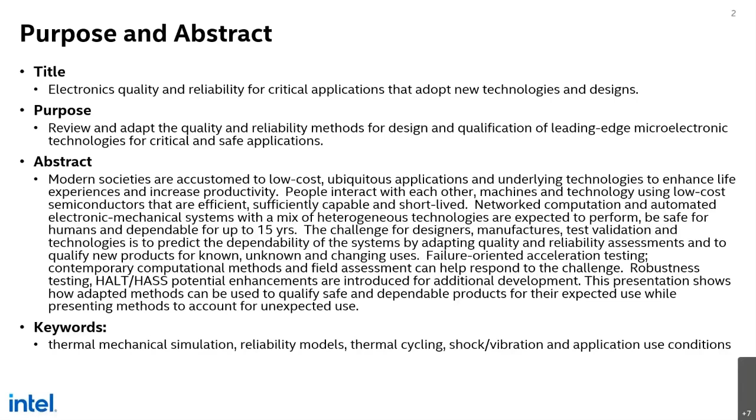We'll talk a little bit also about the HALT and the HASS methods in the context of the presentation here. We can recognize that those are a little bit different testing, and we'll see how we can use them. So we'll show the motivation, the demand and the use environments, so what we will be designing for and testing against, and then we'll speak a little bit about failure-oriented accelerated testing. And this essentially is test to failure, as was mentioned in the previous presentation.

And this particular verbiage was actually defined by Dr. Suhir here. And then the physics of failure models, specifically how we'll use some different sorts of failure models and look at the physics of failure. My undergrad, part of it is in physics, so I may have a different view of this than your traditional folks in mechanics or in electrical, which dominate a lot of people in packaging and some of the semiconductor reliability. So I'll put that spin on it. Then there's the statistics and its implications, and again the discussion on the HALT test and the HASS testing.

So the motivation that we have today is essentially that the electronics we use are ubiquitous, so they're all around us and they enhance our lives. We tend to access them with short-lived mobile phones, tablets, or through gaming devices. There are other devices that are productivity devices that have a medium life, so we pay more for them and we expect them to be available more often, and the level of performance we expect to be somewhat higher. And then there are infrastructure and safe devices that are very long-lived, very expensive, and have different sets of requirements. So these are the devices that we'll be talking about today, essentially the infrastructure and the safe devices.

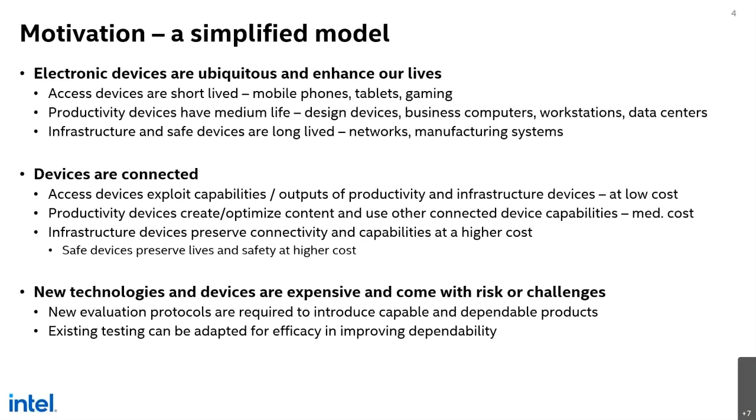And we can speak a little bit about that. So all of these essentially speak to some part of dependability. And dependability, we will have a discussion of that in the next slides. So the dependability is most important for shared use and safety. So if we really want to have ubiquitous computing, and it's like a utility, a telephone, you turn it on, it's there all the time and we don't notice, then we need to have a different approach and look at things from maybe a system level approach and then down to the component level approach.

And then the reliability and essentially dependability, we have to design into systems and components a priori. This can't be qualify it and then improve. You have to understand the use a priori and design that into the technology. So that goes into every aspect of the decisions made for the technology you're using. So if you're using certain transistors, they need to operate with a certain performance. You need to know how they're going to be used in the end and what types of circuits that you're going to use them on.

That allows you then to change doping levels and the gate lengths and materials from the atomic scale. And then when you move into the packaging level, you're going to pick different materials to accommodate the various stressors that come from the various temperatures or the various electric fields or these days maybe even magnetic fields.

And then lastly, we want to have some quality and reliability estimators that are validated upon qualification. So this is basically a building process. You need to design in reliability, test for it, and then you need to test for the quality and make sure that those reliability estimates are all good. And we'll have how that flow works courtesy of my co-author Joe here.

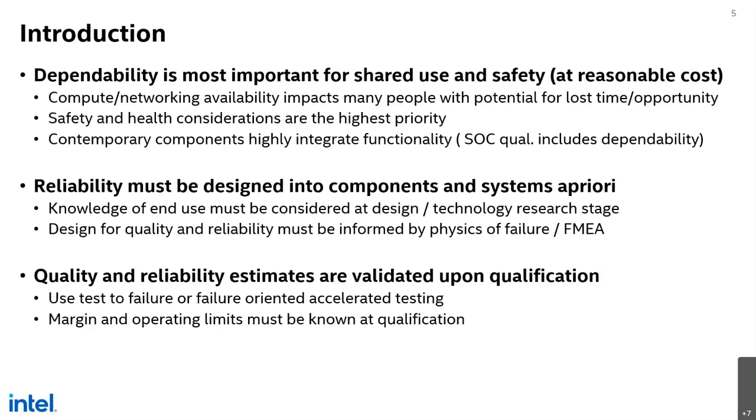So again, another slide on the heterogeneous products that integrate many functions. And this slide's a little bit complicated, so I'll walk us through it. If you look at packages, let's say about 20 years ago, they were very simple. They came in a standard design and a standard layout. So you connected to power with pin 1, and you had outputs in pins 5 through 8, sort of like that. That would be a standard design.

When we moved into plastic BGAs and even starting with the PPGAs, we started to see some customized design. And with the plastic FC BGAs, we were able to then start optimizing electricals in the package to match or enhance those electricals that are needed by the silicon. So that interconnect and the optimization there became very important. We were then also able to start optimizing electricals and lastly, thermals in the package level.

And as we go forward here into these custom designs, we're moving now into full design integration. So you have silicon or many pieces of silicon that are integrated onto a package, and maybe there are packages with many pieces of silicon in them. So you're nesting all of these various technologies in with each other. And you have various design integrations, and you have a lot of co-optimizations that are taking place there from the electrical level, the functional level, the thermals, and the mechanical levels that need to be dealt with.

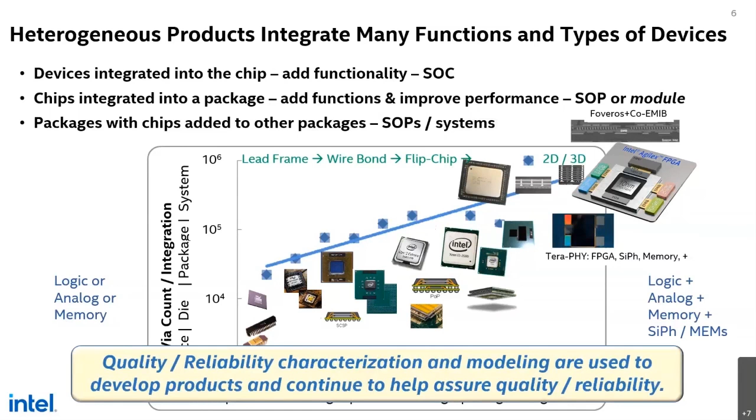And these days we've moved from a logic or analog area from 20 years ago into where we've mixed analog, logic, memory, silicon photonics, and maybe even MEMS on the same package, depending on the application. So all of these require some level of quality and reliability, and they're used. We can also use that same information to develop the products and to assure that in the use environment and the expected lifetime that we hit those targets.

So I've recycled this slide, but I think I'll give a kudos here to Professor Suhir. He was able to look at this slide and say, hey, I can derive an equation for doing that optimization. He has a publication that was done on that; we worked with him. But what we see is this slide tells us that we are looking at product cost and the cost of failure versus the quality and reliability.

So if we want to sustain a high failure cost and returns at a low quality and reliability, we can. Otherwise, we can start to do quality and reliability testing, or design for quality and reliability and test. And the cost will go up. So the total cost essentially goes up as you start to add in more quality, reliability, and testing. And there tends to be a sweet spot somewhere in the middle.

If you're in the far right-hand side, you're in a niche business. So you're in the 20-year lifetime business. You're in a military business. Hey, I only want parts that operate at up to 150 or 175 degrees C, and then minus 75 or minus 80 degrees C. And they have to operate. So that would be a very niche application. And those parts also would be very expensive, not only due to quality and reliability, but because there's no economy of scale. That's why people are going to the COTS, because you have economy of scale and they're widely available.

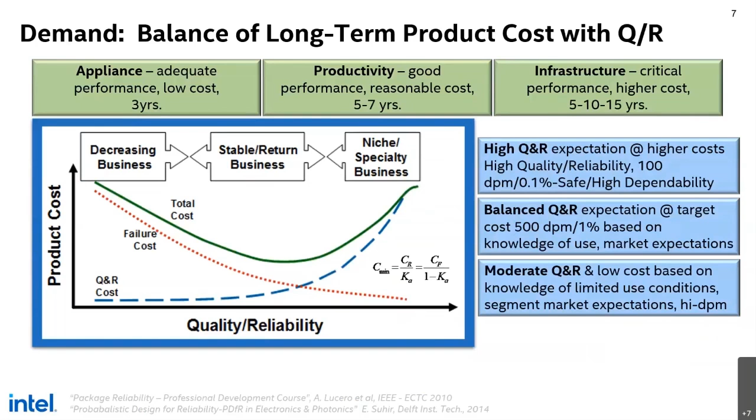Okay, so let's talk a little bit about dependability. Most of the parts that we are building these days are no longer discrete components. At an IP level, you've merged them onto silicon, so you have memory controllers that were before discrete components with a CPU or a GPU, now on the same piece of silicon in another area. That's one way to do integration, and then we've started to integrate different parts of the system into the CPU itself or into the chip itself, and then into the package as well. And all of these need a high level of dependability.

And it turns out that they're all quite related, and for instance, a robust technology has some level of reliability or extra reliability built in. So that can be essentially quantified and traded. How much do you want? The same thing with availability. Can I perform to specification at all of the temperature ranges? Or is there some level of failure or quality that I miss there? So when something does happen, can I recover? And that would be the recoverability. And can we design in features like RAS or soft error correction to give us some level of resiliency or durability?

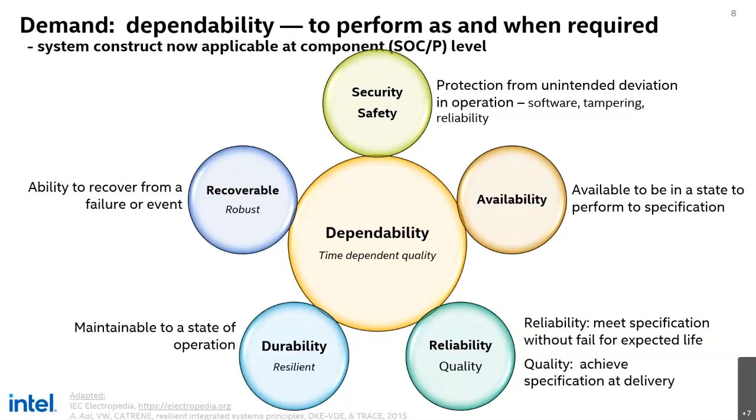So these are the areas of dependability that we speak about, and these are the areas also covered by FUSA, the functional safety guidelines for a lot of the autonomous vehicles and factories that are coming up. And they're all quite related to quality and reliability in many aspects. And they're very interactive. For instance, we can put in software that impacts the quality and reliability, or we can have software that impacts the resilience. So all of these are very interactive, and that's how we fit in.

Getting into some more detail, one of the things we need to consider during the design, manufacture, and testing of durable systems is how we do this so that we're successful the first time, not by trial and error. With new technologies, you don't have the luxury of having 4 or 5 or 6 generations of silicon and package design rules to rely on. So you have to essentially understand things a priori. One of the ways you do this in the product design stage is you do design FMEAs.

That would be on the upper left-hand side. To do those, you need to understand the customer expectations and their uses. And you need to essentially use what you've learned from the previous processes and heuristics to do a probabilistic design for reliability. I don't get too much into that here, but the same tools we use to predict reliability can also be used to predict what reliability you can get and do optimization in the design stage for the next products.

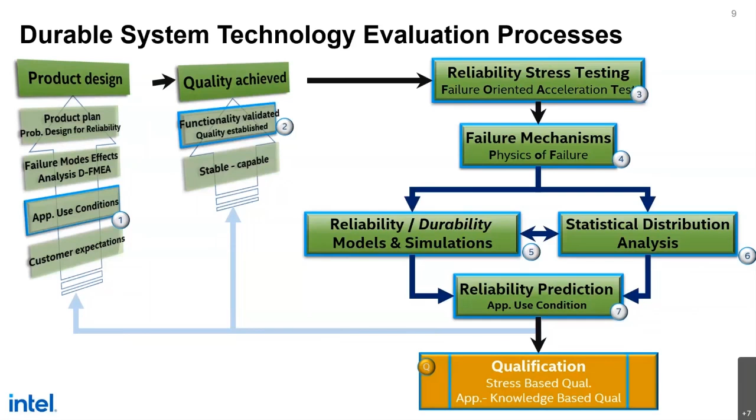So if I were to look at this from a stress-strength perspective, reliability is essentially the overlapping or interference of distributions. On the left-hand side, we have design quality. You want to design an operating range that's in between the demand and the strength, so you don't want the demand or stress to exceed the strength in the operating range. You want to have some margin, and that's what the little black items are there.

Turns out that properties and responses change as you go through life, so you're able to define reliability and hazard functions where you start to see the demand overlap the capacity. And that interference then becomes the failure percentile. There's been publication that has suggested how you can take advantage of some of these optimizations to meet the stress versus strength, or the demand versus capacity optimization for individual failure modes. And I believe there's maybe some construct for multiple failure modes at the same time as well.

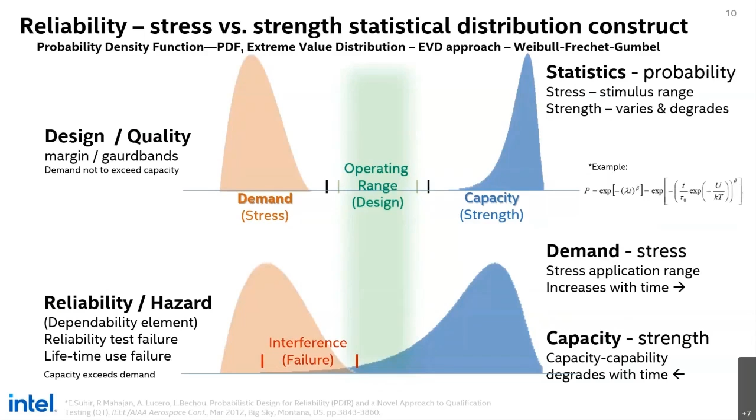Now, if we look at the HALT, the highly accelerated life stress test and screening, these are a little bit different. We still have the operating margin in the middle, and you have the product spec in between that. But when you apply highly accelerated stress screen, you're starting to look at the ends of the stress and strength curve. You should be able to find basically weak links or weaker areas in the stress area, or maybe there's certain aspects of a construction that make the stressing a little bit higher, and the strength may be subject to process capability or materials variations. We can speak a little bit about this in the next few slides.

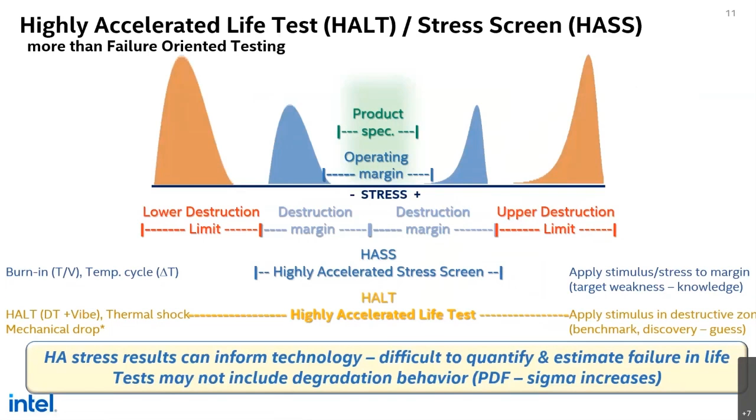I think the key thing is with the highly accelerated life test, you can inform technology, but if you use the HALT test in particular, you may have yourself in a difficult area to quantify the estimates of failure in life. And that's just because of the way the distributions change during the test life and the life testing.

Okay, so the next thing is the failure mode and mechanism, and we'll just spend a few minutes here. Failure is essentially the failure to meet an operating or conforming spec, and it's detected by a mode. So when we do testing, we're looking for things, opens and shorts, IV shifts, insertion loss, for instance, or visual attributes. From those tests, there may be resistance or a parametric value that shifts. We may then extract the mechanism, which is the physics. What is the driving energy for failure? And that driving energy can be chemical related, a flux, or a field related type of energy that you're going to look at, and we'll speak to some of those, but this mechanism is key.

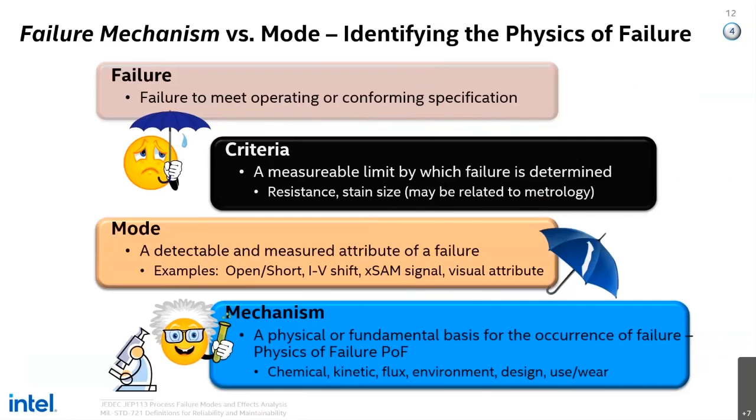So I've given this foil probably around 2010, about 10, 11 years ago, and I've updated it slightly. I've changed a little bit of the observed failure rate slopes. But essentially, we want to be in the area of a decreasing failure rate in the early life, this is the bathtub curve. And there are various ways to do that in the test environment before you build up a product. In life or in use, you'll be seeing a constant failure rate. That means that there's random failures that occur. Neutron hits might be considered a constant failure. Neutrons are always impacting the environment here, or alpha particles getting cascaded. And then lastly, you have an increasing failure rate, which is related to wear out. These tend to be intrinsic related failures.

So our goal and our challenge is essentially in all these areas, in the early life, to accelerate the early failures and to accelerate the life failures. And we do this by the failure-oriented accelerated tests and through the physics of failures models.

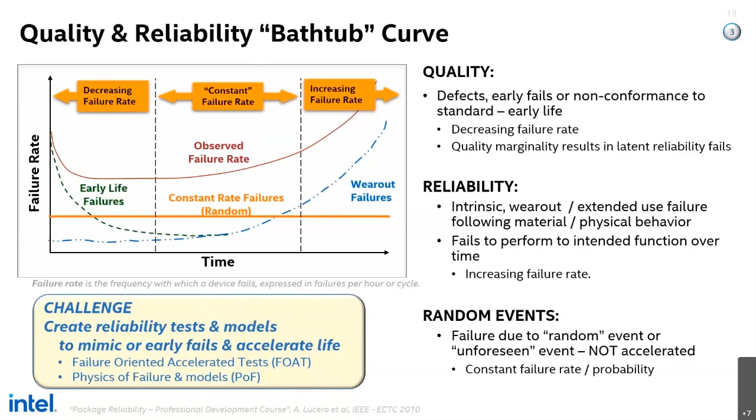So the role of test is very important. We saw that in the diagram there. And it's a scheme where we essentially screen for quality and performance issues. And the coverage in that scheme is typically defect-based detection. And we derive that from known or modeled structural and functional fault modes. And this can be considered a way to do HASS, highly accelerated stress screening.

And the way that we would do it from a new technology development point of view is we would start with wafer level sort or testing there. You can apply a stress at wafer level before parts go into assembly and start the screening there. And that could be a structural test, or it could be even a reliability test in line in the wafer process. And then you move into assembly and you're going to do some more testing and more burn-in. So you'll do another structural test, another burn-in, and you're going to find more failures. And those will be latent failures. After that, then we'll move into classification test. And then subsequent to that, you can validate all of this on a system level test.

So these days, we do stressing at the wafer level with what we call a high voltage quick kill, which is essentially a way to increase the voltage at a wafer level on an individual die level. We can do it at hot or cold temp, depending on the failure modes we're after, and start the screening from the very beginning. What this is leading to is essentially an interleaved screening process from the very beginning of the metal layers all the way through to package assembly and out into when you have a product. The test content evolves differently depending on part of the process you're in. This methodology needs to be pretty robust, and we need it to meet demands of the future package architectures, which I'm going to show you how it plays out in the next slide, a little bit more complicated.

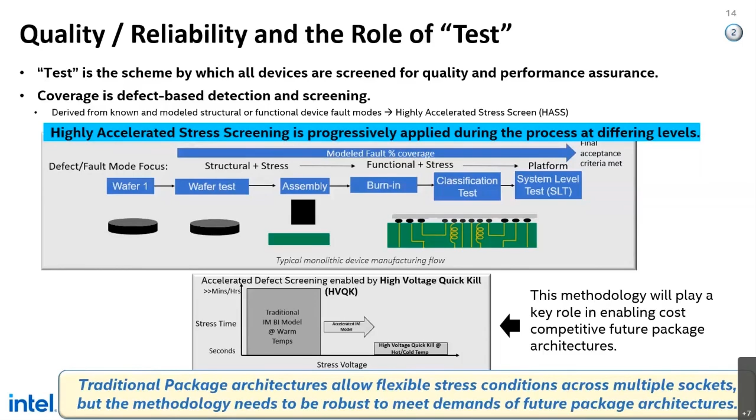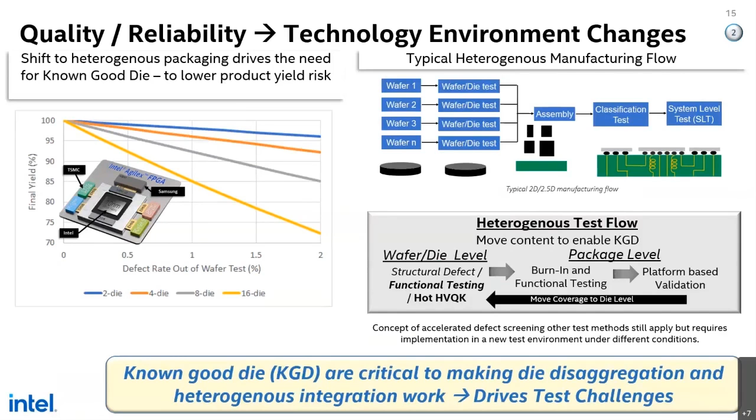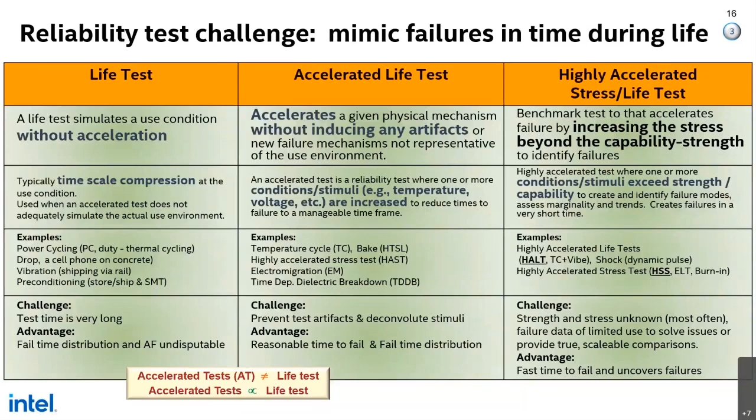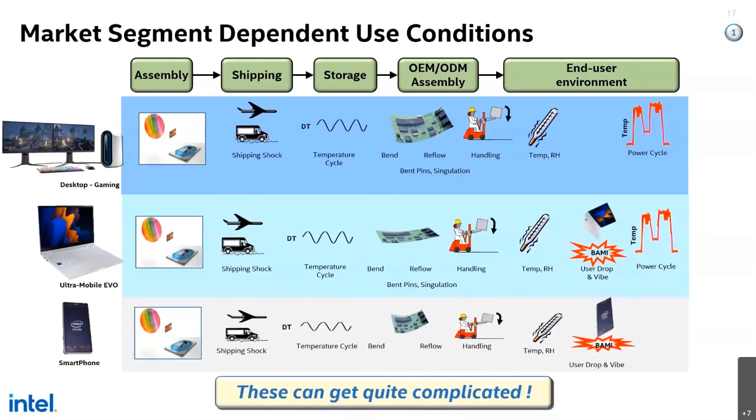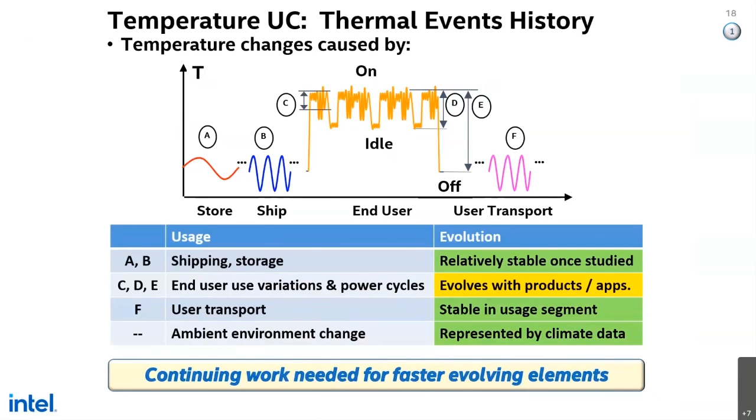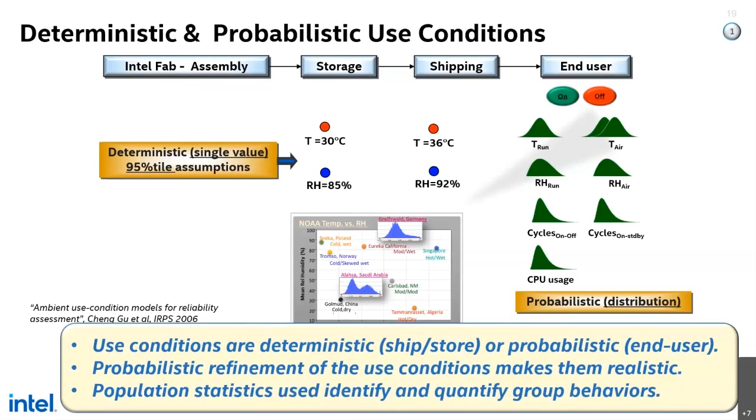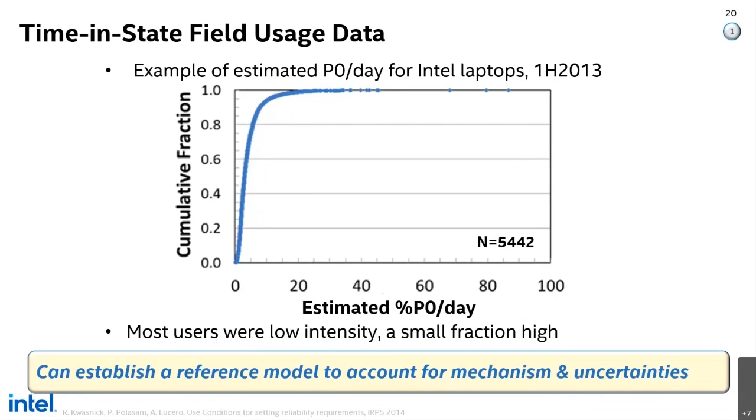Here's an example of some work that we do. At Intel, we can monitor a lot of our own systems internally. Here we have a sampling of around 5,000 systems, and we can estimate the amount of what's called P0, essentially full clocking in one day. You can see some systems are at 90% full clocking for a full day, but the vast majority of them, over the 95th percentile, are probably less than 20% full clocking in a 24-hour period.

You can also do the same thing for off time or humidity exposure, and look at various data for the same thing, applying a different model to find out what kind of moisture concentration you're dealing with when you're doing designs and selecting materials.

You can do the same thing for a number of other cases as well. What you need to do is figure out where you want to be on the probability curve, because you can always design for the worst case, 99.9999%. But if it never occurs, then you will have spent your money on exotic materials.

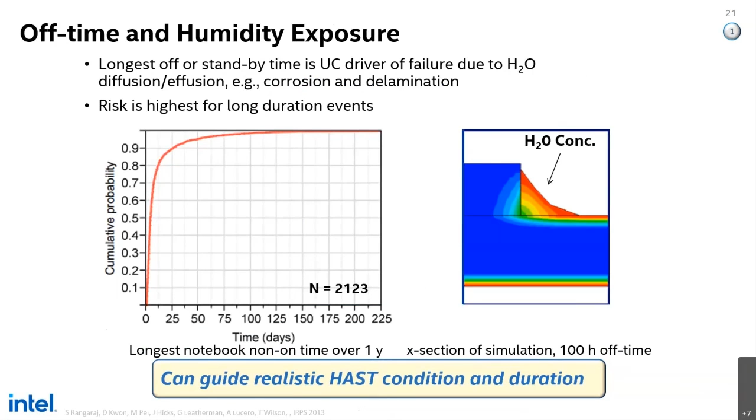Okay, I'm going to shift quickly into the qualification requirements. One of the things we do is understand the customer demand and the use case that they have.

This really drives what we do. So if we want to use a part in an airplane in avionics, it's probably better to understand that environment and design for it than to repurpose a part, because that comes with other risks.

There are competitors we also have to be concerned about. Does a competitor offer a better product, and can we get the same thing? That's another thing we need to worry about. The capabilities—can we achieve this? Can we have a process that can do what we need it to do? And then, what is the engineering, what is the cost? Can we make money in this market, or is it just a niche product and we have to raise the price?

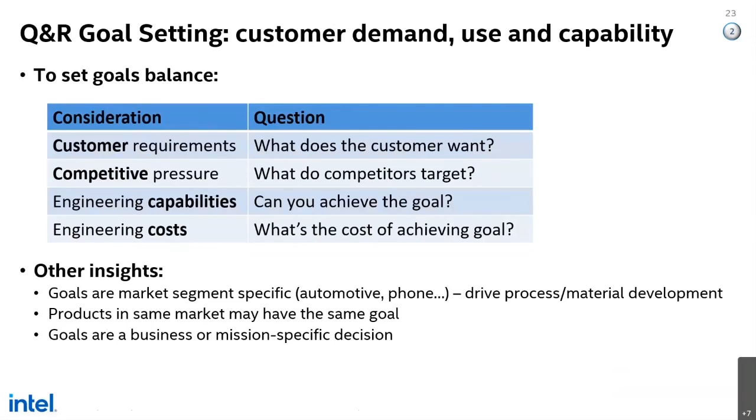These are insights that we need to consider also with the design. They're not at the same level as engineering quantification, but you can put a number to them. So there are two types of qualification that can be done in the end.

One is stress-based qualification, which is essentially buying into a used or assumed use case, in an assumed environment from history that has been tabulated. We do this all the time. All of this is the JEDEC standards for stress-based qualification, telco standards like Telcordia. These are based on use conditions and cases maybe 20, 30 years ago.

That's the stress-based qualification that we're qualifying to now. And because we use legacy packaging and silicon technologies with a lot of history, we're comfortable with that because we get a cheap price out of it.

If you're going to use new technology, then you need to understand the failure modes, physics of failure, and design for the use environment. And that requires, from the very beginning, inserting heuristics into the FMEA, but also inserting physics of failure models to make decisions about how you design.

Those go into EDA kits that then also test or estimate reliability in design using the physics of failure models.

When we develop technologies, we validate those physics and models. We then do the testing, failure-oriented testing, and we define failure statistics—what are the ranges of material properties used, what are the ranges of variations in the test we use. All of that goes into the testing and characterization.

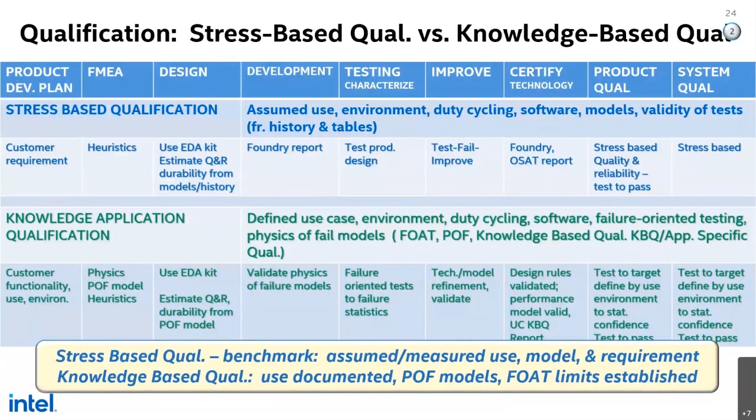So what are the stimuli that we look at? Here's a listing of a number of ways. So remember, we said we were physicists, so we're going to look at what drives failure. And all of those stressors or stimuli are on the right-hand side.

So any one silicon and one package has essentially all of these that are considered in all of the use areas. So we look at the IM, we look at extrinsic defects, we look at the wear out. These are all like hot carrier or solder joint cracking or interlayer cracking. And in the constant area, there's the soft error, right? So we're able to consider all of these in design and in simulation.

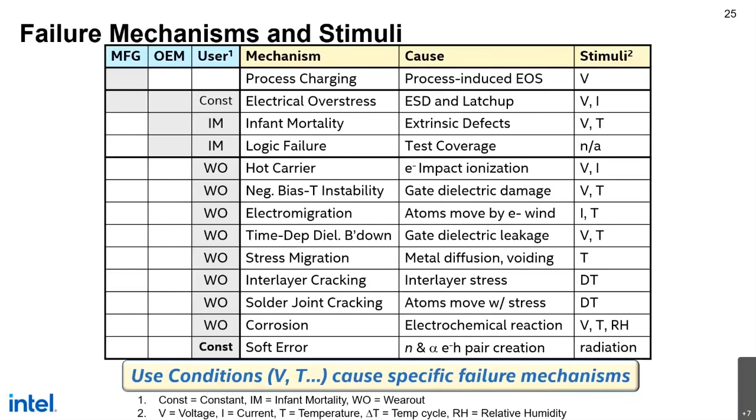Okay, so here is a case where we have a silicon process that was changed, and we didn't pass the 1K hour HTOL, which is a standard from let's say 20 years ago. However, the lifetime that we estimated was 2 to 3x the lifetime of the legacy product.

The reason this was different is because the voltage acceleration and activation energies were different. So when you change the technology, then you need to reconsider the models and the acceleration factors that you use and the acceleration model factors. And if we would have just done the stress-based test without understanding of failure, we really wouldn't have many of the technologies we have today.

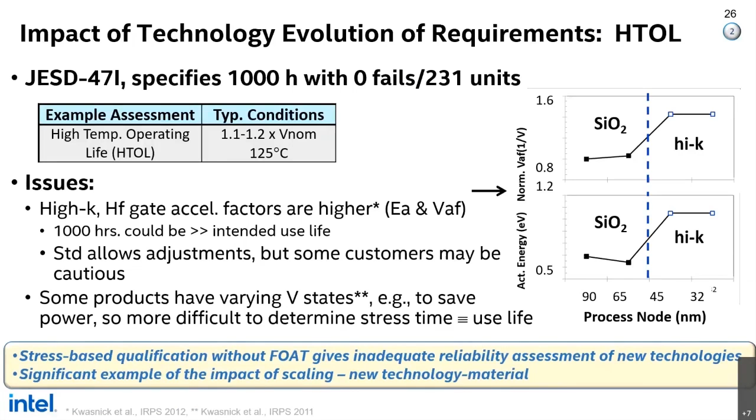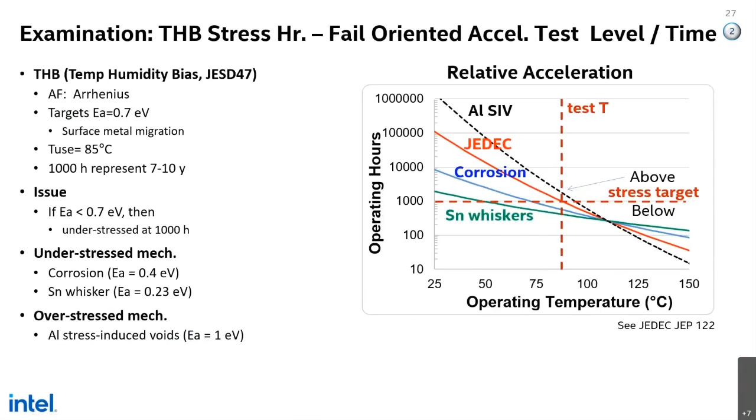This is a THB requirement in red. If you have like tin whiskers and corrosion current testing today, it won't catch those because the acceleration factors are too small. So you really have to consider your stress-based qualification.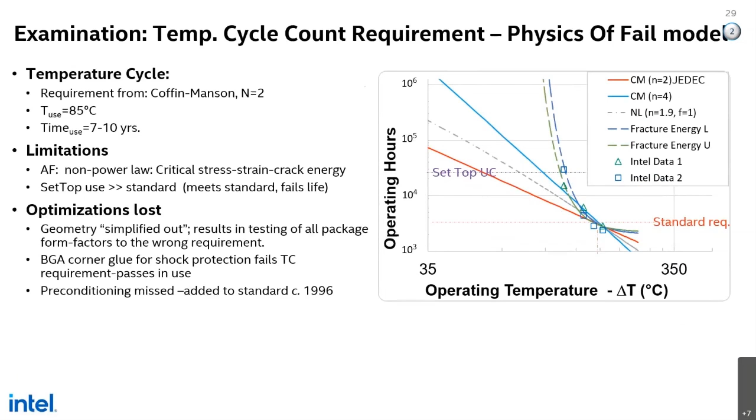And the same thing applies here for the temp cycle. If you take a model, Coffin-Manson for instance, that has certain assumptions in it and certain simplifications, and if you follow that model, you might have a technology that fails but passes in the use case. And it passes maybe in a more rigorous environment, a set-top environment, but it would fail in the qualification, the stress-based qual test. So you lose optimization, you lose markets.

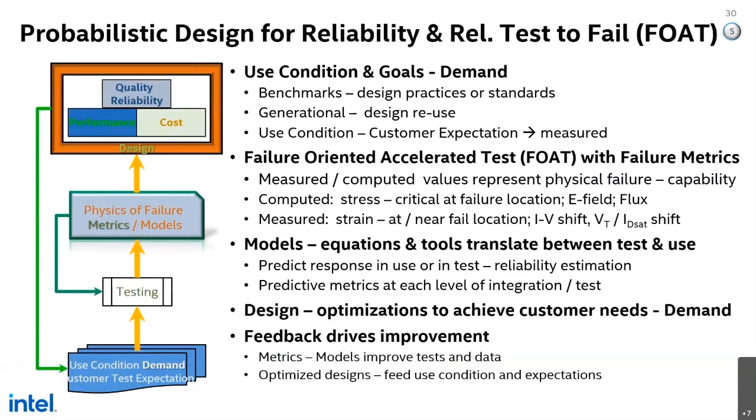So how do you do this probabilistic design testing? You start with the use condition, you do the testing, you develop the physics of failure models and the prob design. And I'm going to move through this real quick.

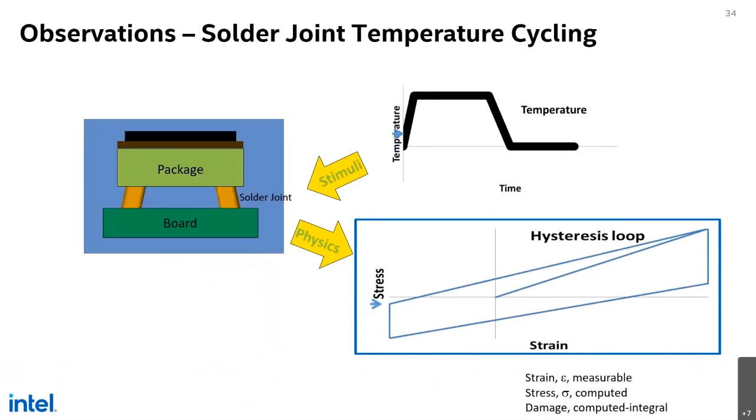This is an example. This is a temp cycle one that folks understand. And we can all buy into the fact that really strain is the metric that we can look at and compute stress and understand that accumulated stress to fail. Okay, and that's something that we can do.

So previously, we can use a Coffin-Manson equation and think that we're doing reliability, but we're really not. The best thing to use is the cumulative peak, creep, and fatigue damage model, and this can allow you to do essentially predictions at various use conditions and different geometries, rather than the one geometry that you've been testing all the time, which we're changing every day. So we need to do this.

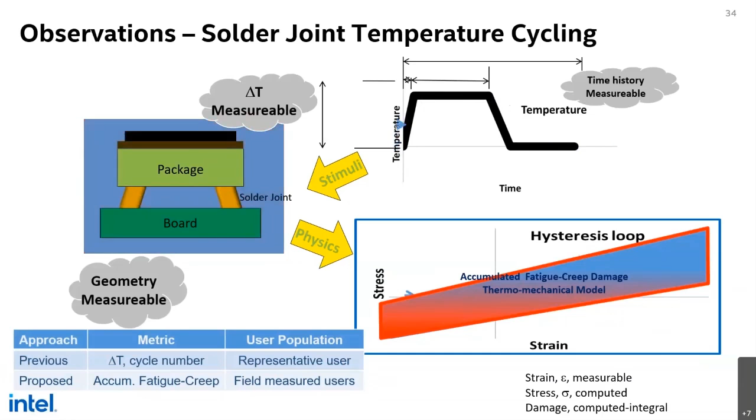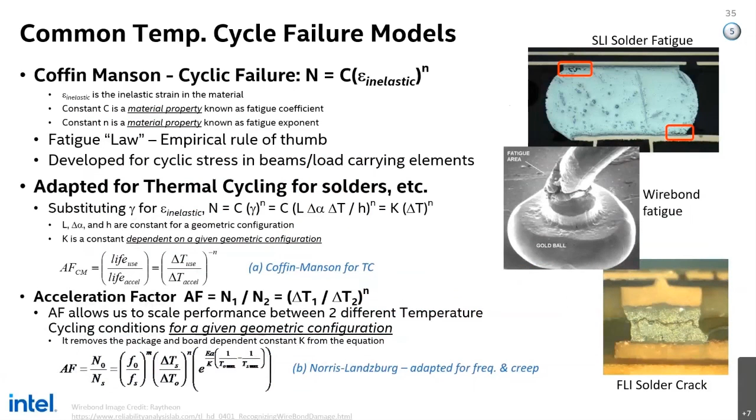The common Coffin-Manson model that's used in temp cycling—all I'm going to say about this slide, and you can look at it afterward—is we've simplified it to call delta T equal to strain. And that's probably not the case. And I have a few examples.

One example is this case, where you have a different failure mode that's not related to stress and to the creep and the stress fatigue, but maybe a more brittle fracture. And so delta T is not the one to look at. You need to use that strain, and you need to probably turn it into a critical crack growth energy. And there are various ways to do this.

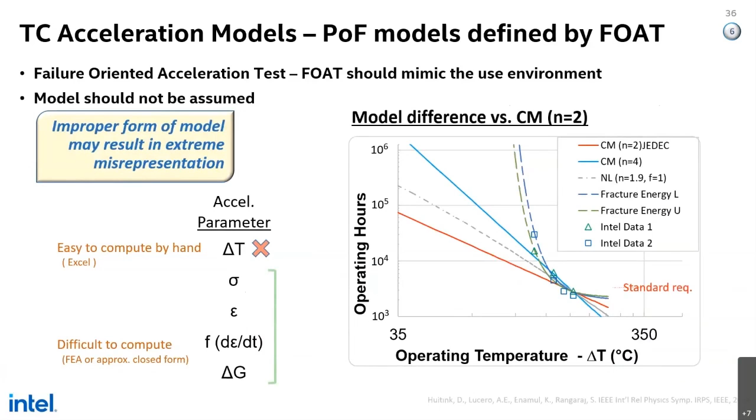Do it through simulation, finite element models, but you can also do it through scaling models. And some of the papers we've done in the last 5 to 10 years have given the same result as a scaling model, although the units are different, because we can solve them without using finite element. But they're very good for design implications and real stress to fail.

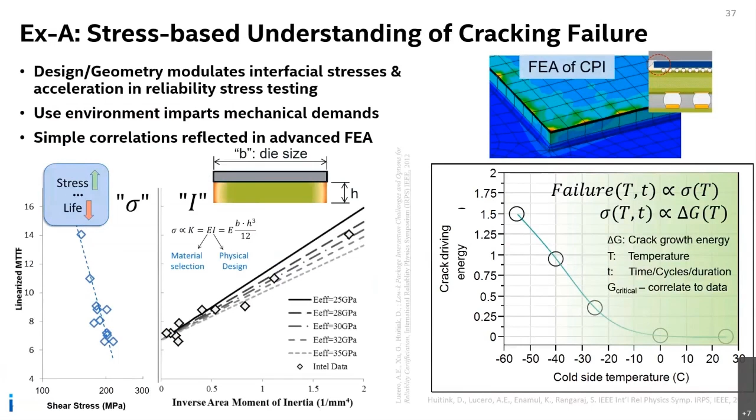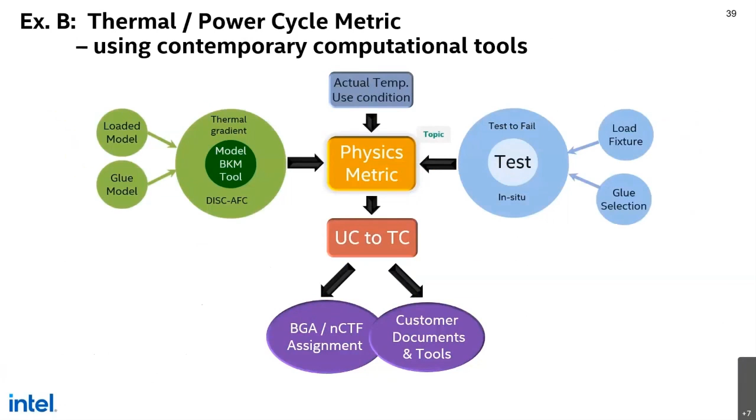So I'm going to move through that one. Using contemporary computational models, we can take that actual temperature use condition, put it in the physics of failure model, change it and look at the use condition to test condition relationship, and we can do customer design tools, or we can tell performance of that part. We can include thermal gradients, glues, basic loads in the test environment in all of these models.

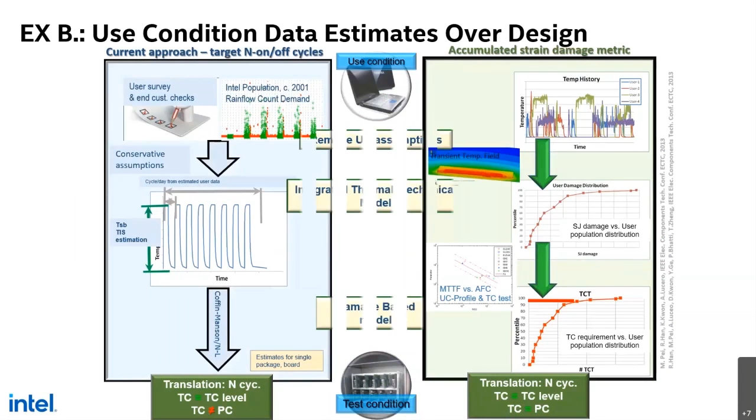And in this case, the requirements were probably 6x different than what we were doing in the past. They were quite a bit lower, and what this enabled was a thinner and a smaller package that particular customer wanted, and it reduced BGA counts and complexity. So the benefit of doing that was cost saving, but it was also the smaller package that the customer wanted at a reduced complexity on their part.

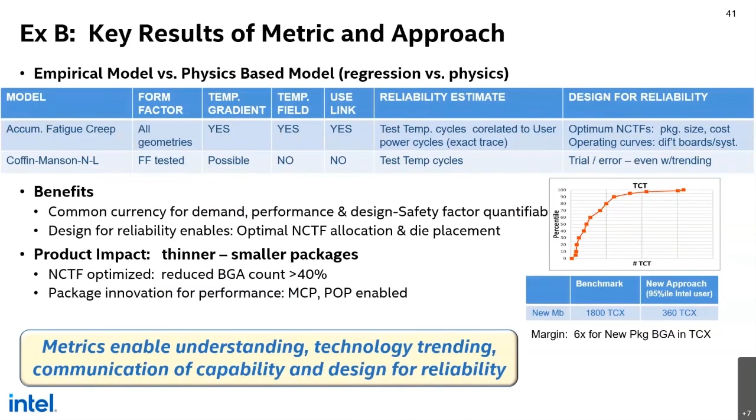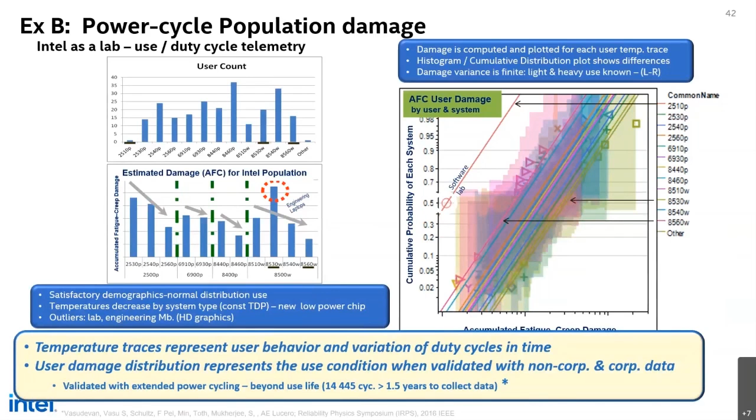You can then also do this from a statistics point of view. So if I were to look at a number of parts at Intel, I think there were thousands here, I can start to look at different systems and how they all perform and estimate what their level of damage is as they go through their lifetime for the various models. And I can even find outliers based on their telemetry. And that allows us then to basically optimize and then look at that goal and determine what would pass or fail in the next set of requirements.

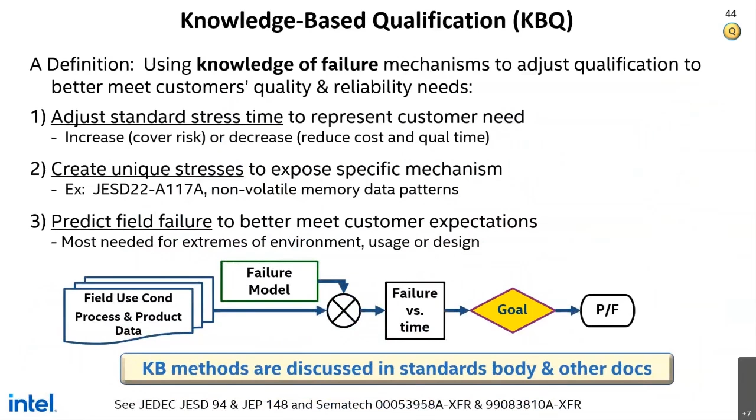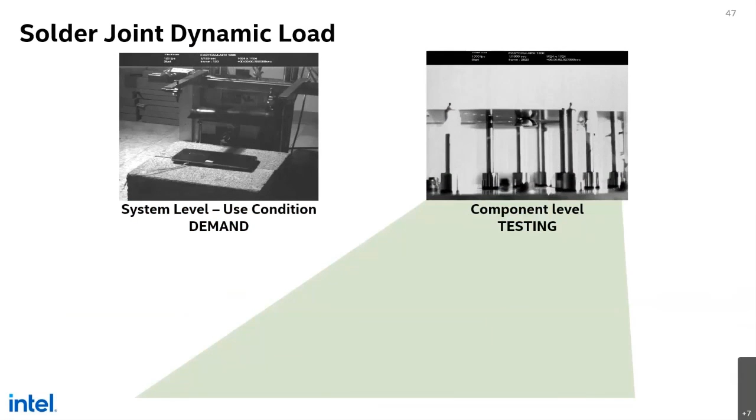So I'm going to look at, again, the HALT test. HALT is shock or vibe events in a chamber that's at temperature and could be with moisture. I would argue that that's an arbitrary test, and you can only tell performance on some configuration exactly the same as the last configuration you built. So if your board is a different size or your system is a different size, the response inside that system is going to be different, and the response, especially at the solder joints where you're concerned, is different.

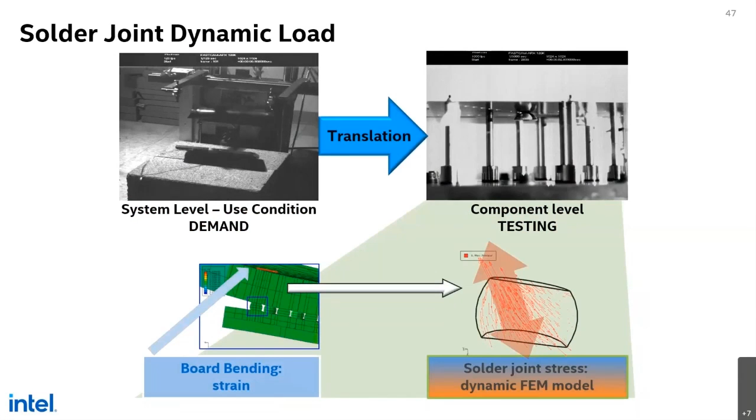So you can essentially compute and understand through strain measurements and computational means what kind of stresses you're imparting, and you can essentially come up with some kind of a stress. If you can measure that stress and model it in time and validate that stress applied over that time is good, then you should be able to optimize the stress distribution. And you should know when you'll fail, and you can design that way for a particular environment. And then set your requirements.

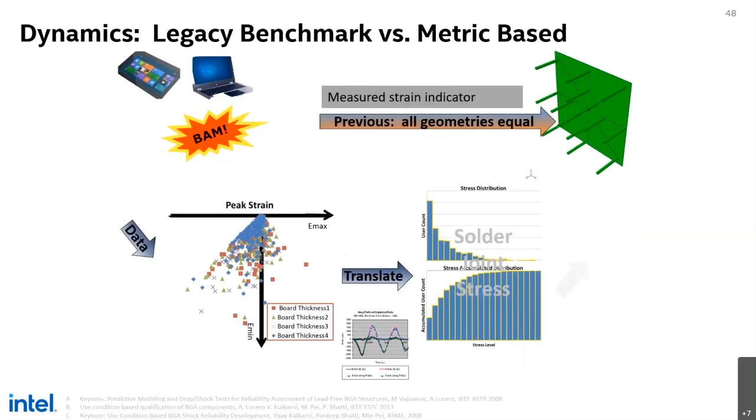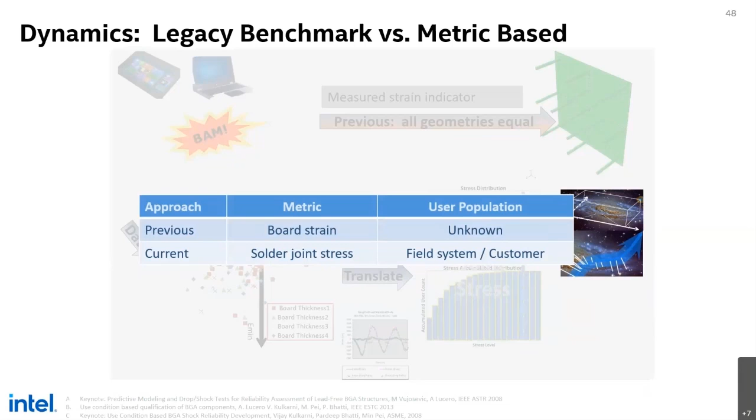So previously, we would have just measured board strain and made sure all the components stay below board strain. But it turns out that board strain by itself, one is there's variation to the measurement, and the other one is variation in the systems that it goes into. It's kind of useless as a metric. The best thing to do is measure the stress, and then you can understand how people are doing their designs to manage that stress. And that's what we've done here. You can find a safe zone essentially for a current dynamically applied stress.

So this really turned from a HALT type of a test where you were looking just to break something into something where if you do the work, you can dig in and you can find out how you can apply it to different geometries and elucidate how you can do better designs.

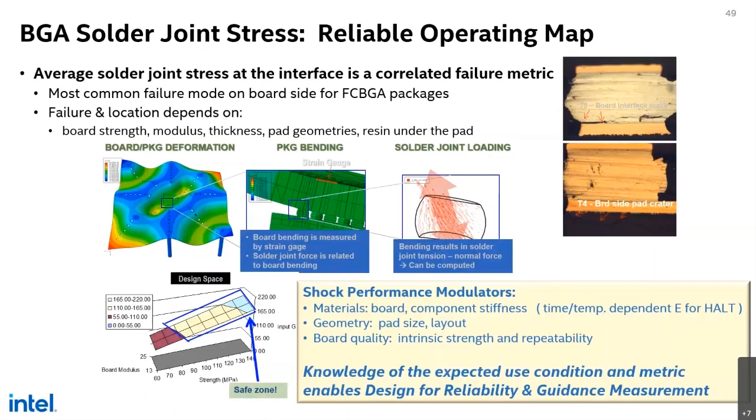So the summary is that we have all of the requirements or elements for a probabilistic design that we've shown. We gave some examples of the failure-oriented accelerated testing, and we compared the ways to do qualification, knowledge-based versus stress-based, and then lastly, what can we do with the highly accelerated stress testing? And silicon photonics is a new area. There are not very many models created for a lot of the silicon photonics. There's Telcordia, which is a stress-based system level model.

But if you look at it from the silicon wafer level and the integration into a module, you don't have very many existing stress test models that can be applied to a known use condition. We don't know the use conditions as well. So all of these principles will have to be applied as we develop standards for silicon photonics. Those are standards we're developing right now in JEDEC for wafer level silicon photonics. And then you integrate them into packages and modules, and that's another set of models. So that doesn't exist for that area.

Any questions? I've rushed through the last part here.